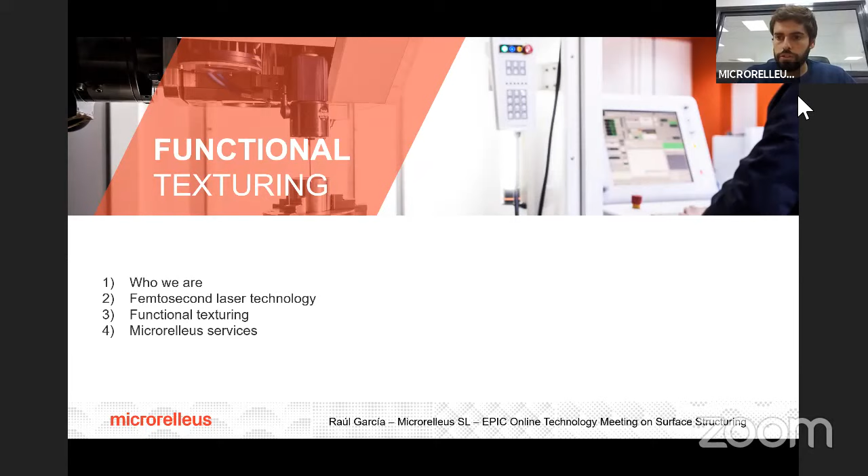So that's our company. We are a service provider for industry. What we do is laser micromilling, laser texturing, microstructuring and industrial engraving since 1983. We are based in Barcelona, and in 2013 we were the first company in Spain and Portugal offering nanosecond laser in 5-axis service, and in 2016 pioneers offering femtosecond laser service in real 5-axis.

For the ones that don't know what a femtosecond laser is, the main advantages against other fast lasers like the nanosecond laser is that thanks to this ultra short pulse duration laser, we are able to achieve ablation, micromilling, microstructuring without almost thermal affection over the part. So we can achieve absolutely burr-free microstructuring or micromilling. Compared with conventional technologies, we can achieve very small details, absolutely burr-free with very clean results. About machining technology positioning, it is between nanotechnology and the size that we can achieve using conventional technologies.

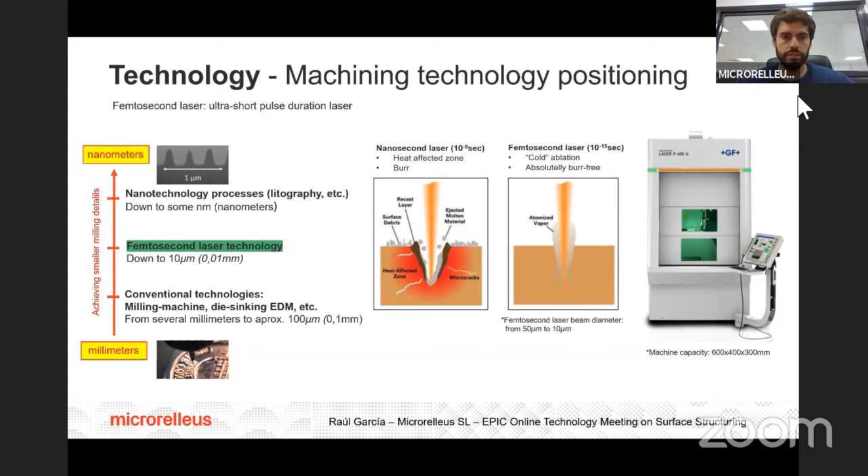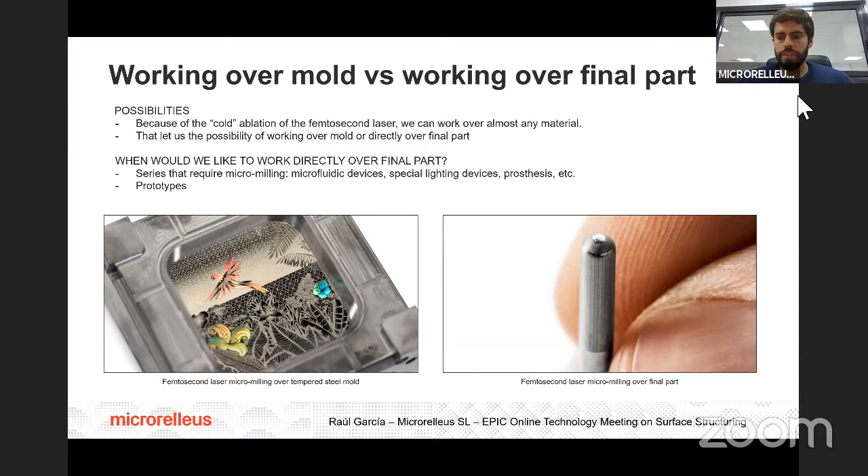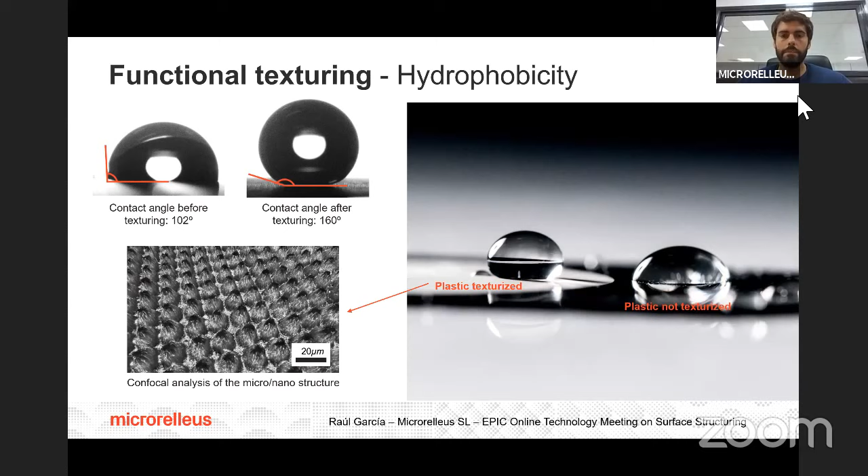So we work sometimes, as I said before, we are a service company. We work sometimes on a mold and sometimes on the final part, and we are going to see now some examples. The first one is the capacity to obtain hydrophobic textures. What we do is we texturize the mold, plastic is injected, plastic replicates the microstructure of the mold, and we can see this hydrophobic property in the plastic part. We can see here the difference of behavior in the area of the plastic part which was texturized and the one that was not texturized from the mold in this case.

In this case here, we can see some sensitive texturing. We can achieve peach skin effect, the velvet effect in a plastic part, as far as we inject a flexible plastic in a mold.

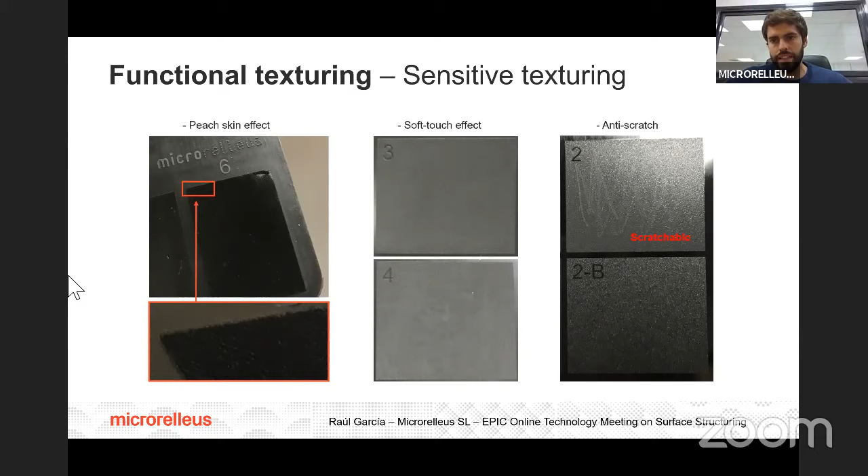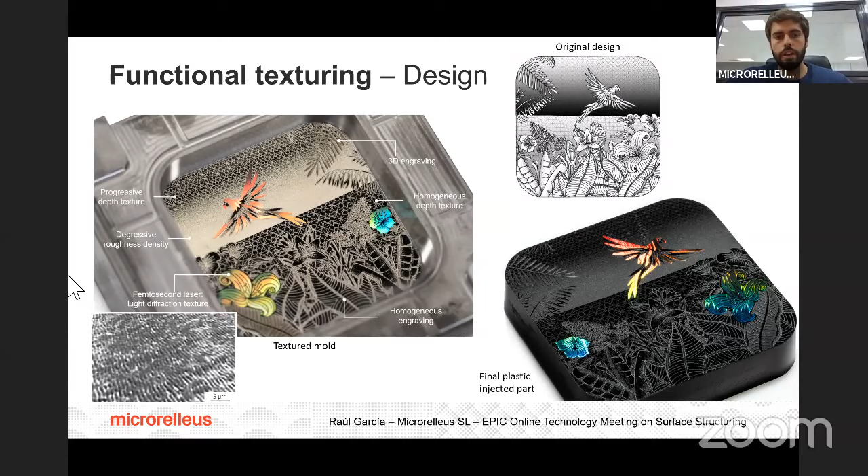We can achieve soft touch effect and anti-scratch effect as well. Speaking about design, we can see an example combining different textures with the light diffraction texture that we can obtain using the femtosecond laser. We worked on the mold and the plastic injected in this mold, and we can see the colors because of this light diffraction texture in the plastic part.

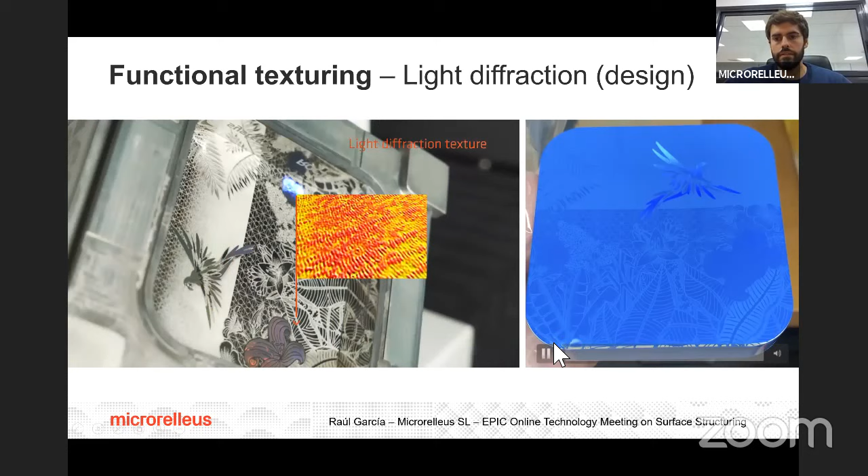We can see here a small video of the mold and a small video of the plastic part as well, where we can see all the colors and effects in the plastic part.

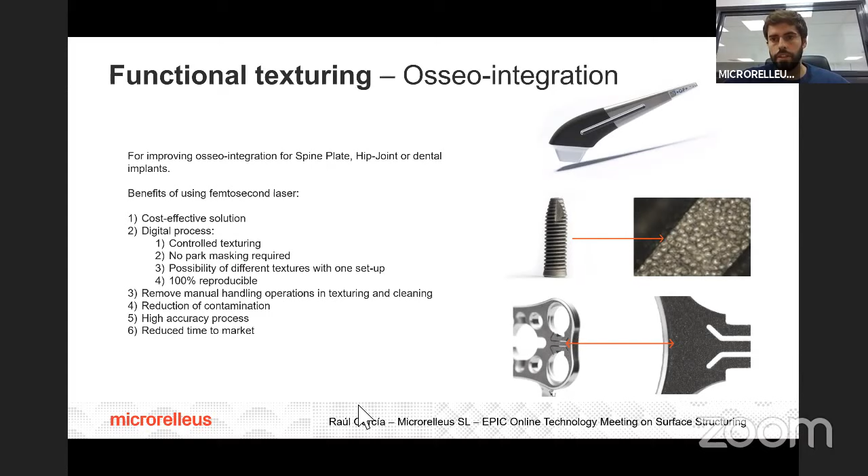If we split directly working over tool or over part: self-lubricating, these small holes that keep the oil here for different tooling. Osseointegration textures to improve the osseointegration in spine plates, hip joints, dental implants, with some benefits against the conventional techniques. About lighting, we are working a lot.

In this case, it's the explanation about prototypes. In this image, we can see some standard roughness that we can find in the market, but we're not able to apply in the prototype, so directly on PC or PMMA, which are the VDI that we can see on the left-hand side, we are able to apply this roughness, which is standard with some values of RA, SA, etc., in the prototype.

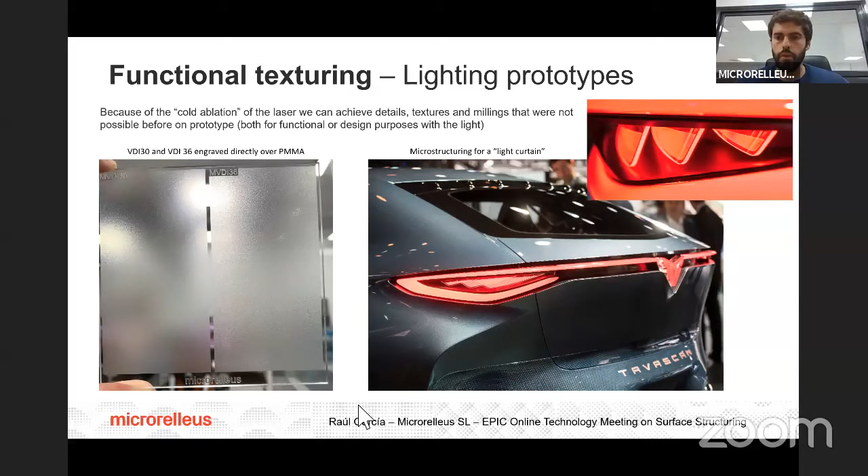So our customer is able to do photometrical analysis of the prototypes, without needing to do the mold. On the right-hand side, this microstructuring is for the light curtain in the rear light of the Cupra Tavascan, presented in Frankfurt last year.

About microstructuring of molds for the lighting industry, the same. We can achieve very small details with very, very small radius. So for optical designers, optical engineers, there's a new limit in the possibility of designing.

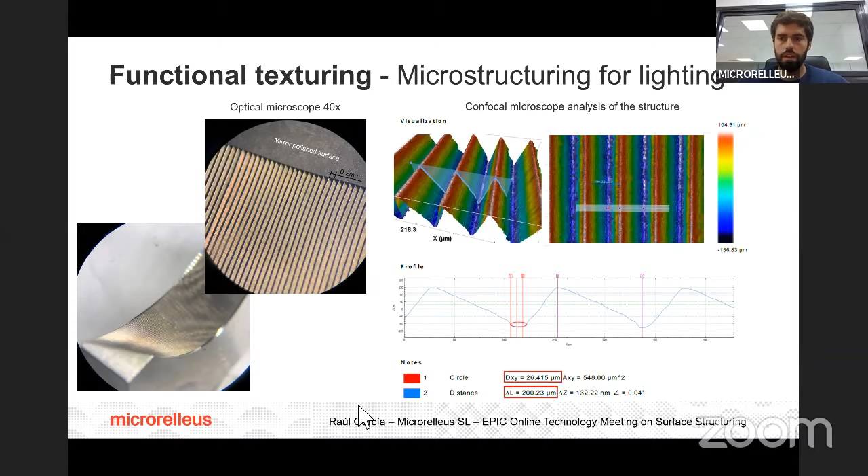And for texturing, again, we can achieve homogeneous light diffusion, controlled light diffusion, that can be an alternative to the standard materials used in industry, just because of using this femtosecond laser technology to work over the molds for the lighting industry.

So it was a small overview about some projects we have done in functional microstructuring and texturing. Sometimes, as we saw, we work on the tools, sometimes on the final part. We do a lot of R&D for customers as well, because there are a lot of new things we can do thanks to this technology.

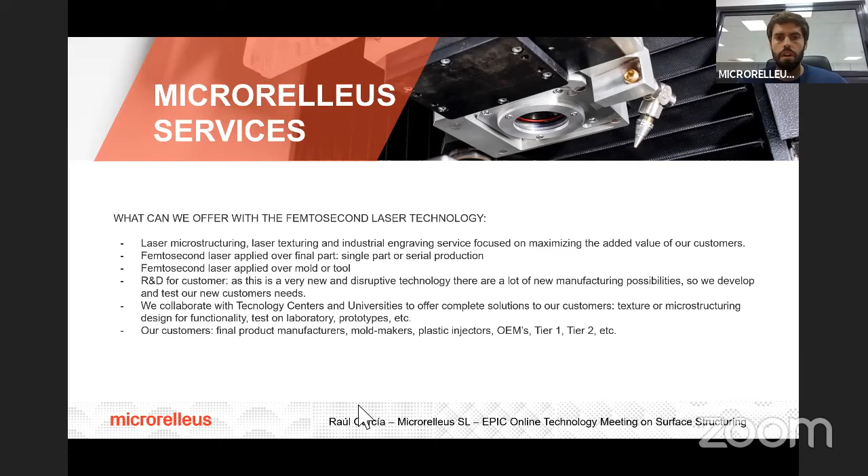Sometimes we need the help of technology centers, universities, etc., that help us develop a texture that we are going to industrialize in the part or in the tool. Our customers are final product manufacturers, mold makers, plastic injectors, OEMs, tier 1, tier 2, from a lot of different businesses, as you saw before.

So that was everything I wanted to explain in these 6 minutes. I don't know if someone has some doubts or something they want to comment to me.

Yes, thank you very much, Raúl, for your contribution. So, as you probably already know, you told us one side of the question, what you can do for this audience. But maybe you can specify a bit what the audience can do for you.

Remember how many people are here, if you don't recognize all of them, there is the full value chain. So any wish that you have, you can express it here, and maybe by the end of the meeting we already have a couple of collaborations about it. But sometimes people don't know that there could be some good functionality for them.

For example, we have worked a lot for electrical appliances, for the automotive industry, for aerospace as well. But a lot of times people from these industries don't know how we could help them with different functional texturing, because they don't know the technology.

Or finally, it's something about thinking how we could improve their product or achieve something that was not possible before for them, just because of this modification of the topography of the part or the tool, without adding any extra material or chemicals or something.

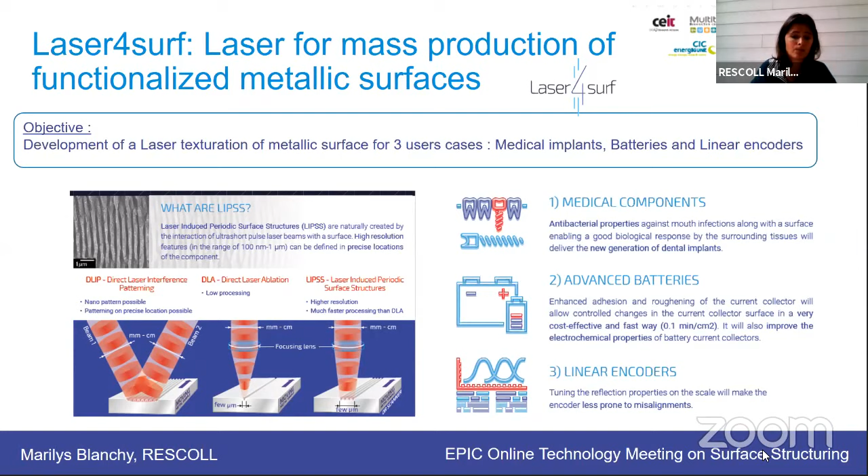So medical implants, batteries, and linear encoders. The objective of the project is to obtain all-in-one machines comprising laser texturing devices, an inline monitoring system, and simulation tools. Applying specific types of patterns and roughness using laser technology has significant commercial potential. It allows improvement of product performance without altering surface composition or adding any coating, especially femtosecond laser LIPSS, allowing cost-effective process times. Today, as I said, I will present the interest in applying laser texturation for medical implants.

So first of all, what is interesting for medical devices to use control of the surface is because there is a failure of implantation from time to time due to wrong integration of the implants—what we call osteointegration. One of the most used materials today for orthopedics or dental implants is titanium, a very well-known and extremely biocompatible material.

It has excellent corrosion resistance and good mechanical properties, but it's also quite inert towards cell interactions. So in some cases implants show long-term failures due to insufficient integration with bone. Several studies showed that good interactions can be improved by modification of the surface, either chemical or physical-chemical modifications.

There are three scales of topography to improve the relationship and interaction between cells and the devices. First, macro topographic features—bigger size features dependent on the design of the implant. Micro topographic features are responsible for mechanical anchorage of the implant to the bone and improving bone-to-implant contact. The last is nanotopographic features that interact directly with osteoblasts, leading to cell recognition and cell proliferation toward the implant surface.

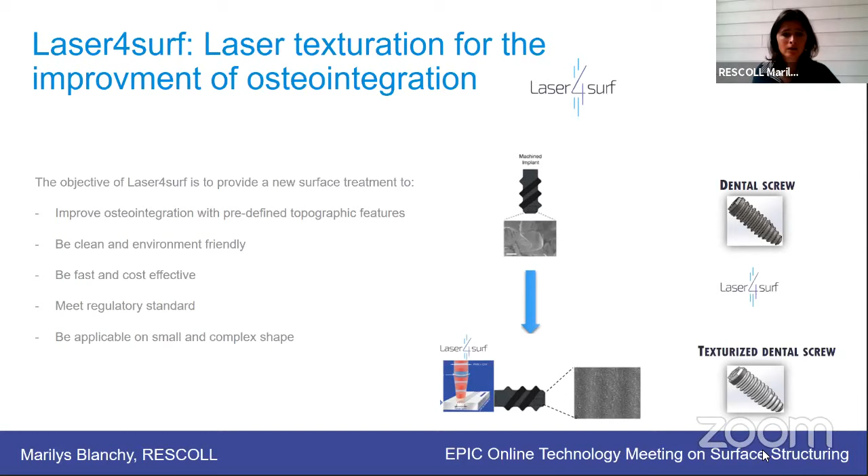If we think about the specifications of medical applications, what is needed for a good technology to be used in medical devices? First, to improve osseointegration with topographic features, to be clean and environmentally friendly, to be fast and cost effective—because if it's much more expensive than already used technology for functionalization of the surface, it won't be worth it—to meet regulatory standards, and to be applicable on both small and complex shaped surfaces.

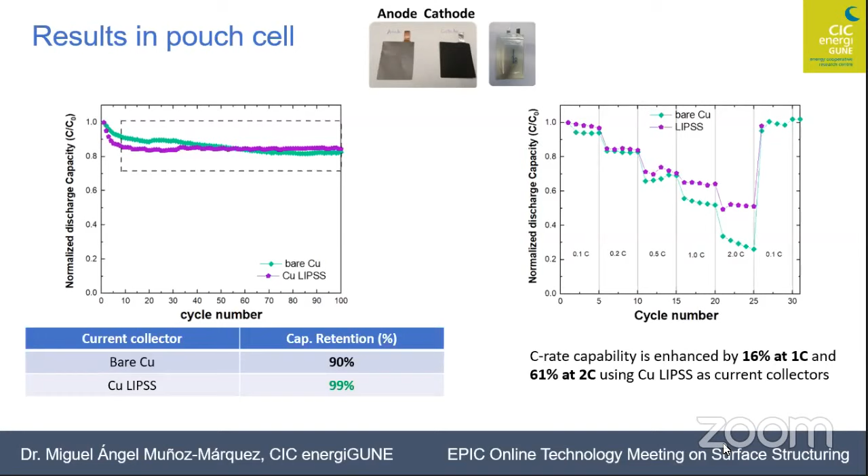I would like to finish by acknowledging the financial support from the European Commission through the Laser4surf project, and all the people who worked on this at both institutions, CIC Energigune and... Now I'm open for any questions you may have.

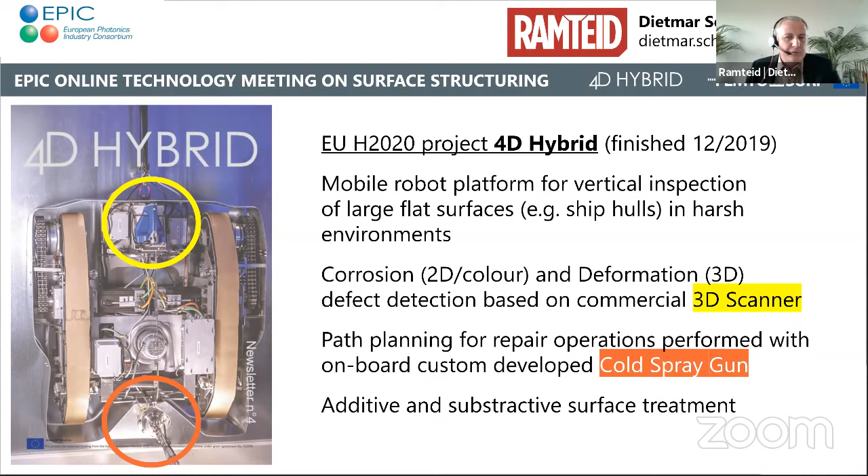The field of view of the camera is about 10 by 10 centimeters, and in the z-axis about 5 centimeters. Everything here works online, so scanning is performed even during the movement of the robot, at a precision of up to 50 microns and a resolution of up to 100 microns.

As I said before, it can detect 3D defects better than 0.5 millimeters in depth or height, or any other shape that the algorithm might have to detect for being repaired.

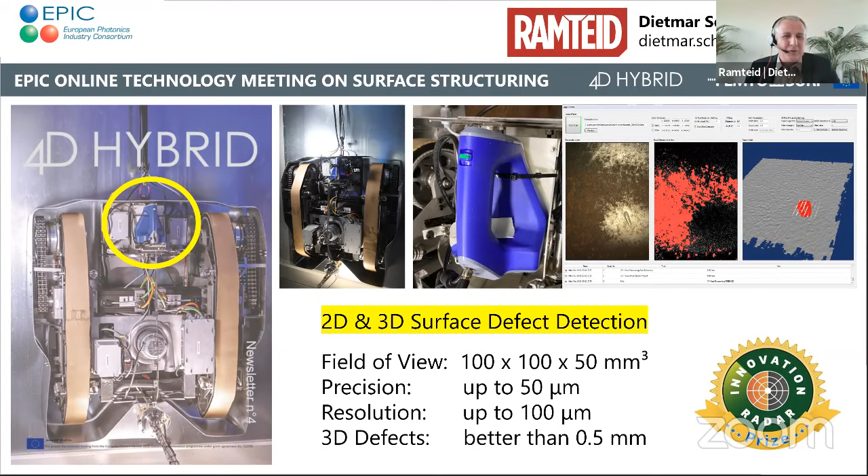This project gained the Innovation Radar Prize 2019 for the most innovative project last year from the European Commission, so we got highly decorated on that project.

Beside this, we are working on another project called FemtoSurf. Later on, Wieners from Femtica will present another part, more or less the laser structuring, and I'm presenting the vision-based scanning of the surfaces, not in the nanoscale as before - this is another project partner - we are working in the mesoscale.

So if the surface texturing is not only happening on very flat surfaces, we are detecting the actual surface structure so that the pattern can perhaps be modified for that non-flat surface structure that might be at the workpiece being processed.

We are using for this - the current prototype of the machine can be seen here at the very left. This is a machine about 3 meters in size, 2 by 2 meters in the X and Y dimensions, and about 3 meters in height, with all the laser infrastructure mounted ahead.

We have a 5 degrees of freedom rotary and movable table, which holds the workpiece, and the laser can be directed to practically every area of that workpiece. We started with flat workpieces that you can see here.

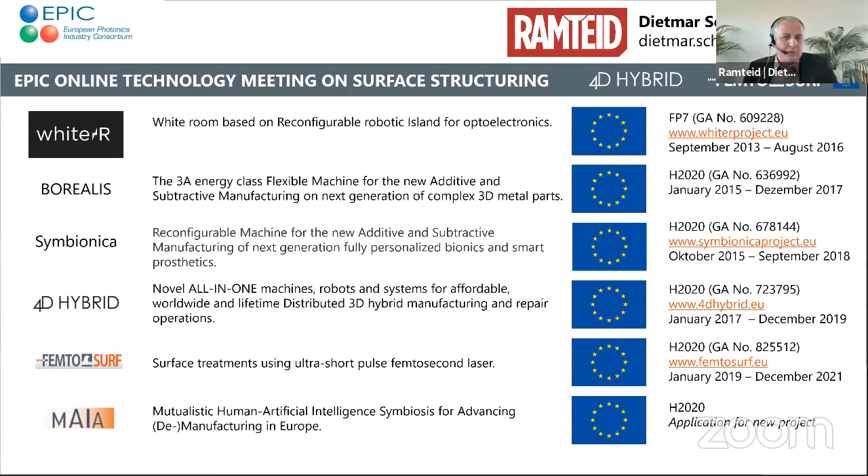Beside these 2 projects, we were also involved in a lot of other research projects from the EU, on FP7 project White-R and others. We provided our vision technology to scan metallic surfaces at a very precise level and provide this even in a real-time or near-time feedback loop to the processing unit of all those machines designed here.

What we are in general is vision-based metrology experts for novel projects, and that's also what we are looking for - partners for other research projects or applications for research projects which need vision experts in their partnership.

Thank you very much, Dietmar, for a great presentation. I am quite fascinated by how many European projects you have participated in. I also see that you are already preparing one. This is an EPIC event.

EPIC is about collaborations. There's a question that people normally get when they are not users: what can you do for them, and what can they do for you? What we can do is provide our vision-based skills and tailor our solutions in a very custom-specific way to their applications. We're not providing a solution for large-scale distribution, but for a very specific, challenging, novel use case.

All right, so basically we have a good set of companies here. I want to understand a bit from the system integrators the kind of needs they have for inspection systems. Not only Ramteid, but we also have companies like NIT and Horiba in the audience. So I want to look at Reinhard now—he gave the opening presentation. Reinhard, when it comes to metrology, inspection, and imaging systems, what kind of cameras do you use, or recommend your customers use, when they scale up your process?

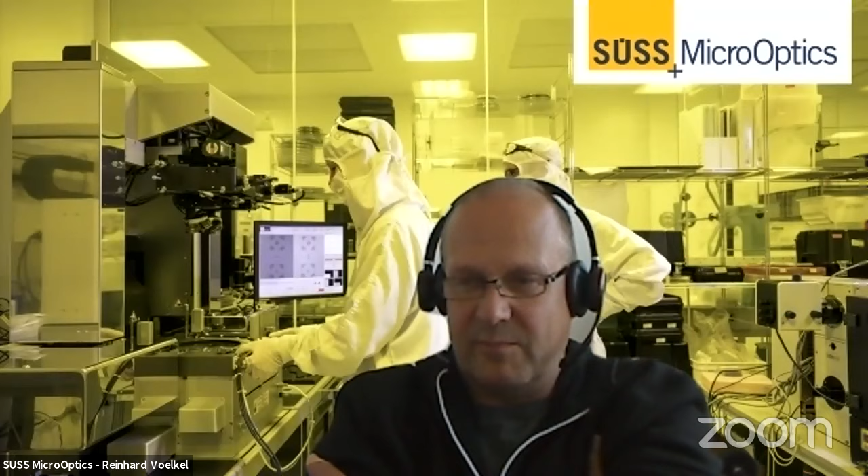Yeah, that's always an issue. So honestly, in 20 years, SUSS MicroOptics, we never made a patent. We never invested in a patent, but it was always our partners who made the patents. Especially what I was saying about this Rochester Photonics case, where everybody came to us and said, can you do it? And can you do it? And can you do it? And we looked in the patent and said, yeah, we can do it, but we're not allowed. So we also recently got an agreement with Fraunhofer for the light carpet, so we are licensing now the patent.

So I once learned from one of my mentors, Bill Hugle, the first president of SEMI, and he said, patents are for big companies who can defend it, or for small companies, if you want to sell the company after 2 years and you want to create some IP. If you're manufacturing, if you got a core technology and your core technology is freedom to operate, that means I'm doing this since 20 years, nobody can forbid it. Now your question is, do you invest in your excellence or do you invest in your patents? And you cannot do both.

So I think maybe I'm wrong, but you are never wrong. Basically, SUSS MicroOptics is a company that has made a difference in the field of micro-optics manufacturing. You mentioned already the light carpet of the BMW, which is a beautiful and successful story. But today we are talking about laser-based surface structuring. Do you have a challenge? Everything has been patented. Everything has been patented already 15, 20 years ago.

It is only people forget about the patents. No, with the patents, I'm very sure - if you look in these complicated nanostructures, surface structures, whatever, it is only you don't have the right keywords. If you look into patents, you'll find a lot of patents. Diffractive optics, random diffusers, all surface treatment - this is all many patents. You could get a patent today, but the patent is not worth much because they just forget that there were 10 other patents on that. But I wanted to talk to you about something else as well.

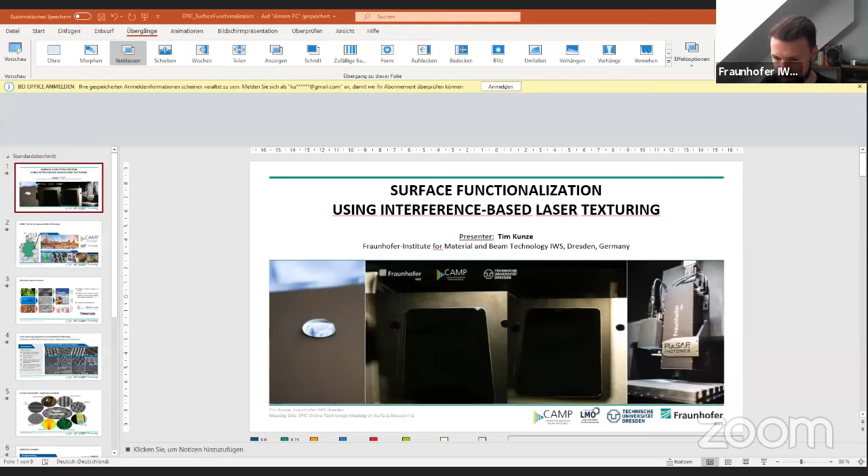Thanks, Jose. So actually, we are - I have to say, not a company, but we are a research institute focusing on, let's say, technology transfer, as Fraunhofer is known about. And I would like to say hello to everyone and also show you a little bit about the stuff which we are doing in Dresden on surface functionalization.

So laser structuring is the topic of today, but of course there needs to be a need in the end. What you see here are some examples. In the middle, you see some sort of high-speed structuring for decorative applications using a scanner. On the left-hand side, a little bit more in the field of wettability, and on the right-hand side, you see actually what we do, which is industry transfer of some working solutions with integrators in the end.

And actually, we are inspired somehow by nature, of course. Most people dealing with surface texturing know the lotus effect, and they know the shark skin and other effects. If you take a closer look at the surface texture, you see that they are very special, unique, hierarchical, very complicated in most cases. The goal has been, for many years, even decades, to bring that onto technical surfaces and address anti-icing on airplanes and deal with friction or biofunctionality issues.

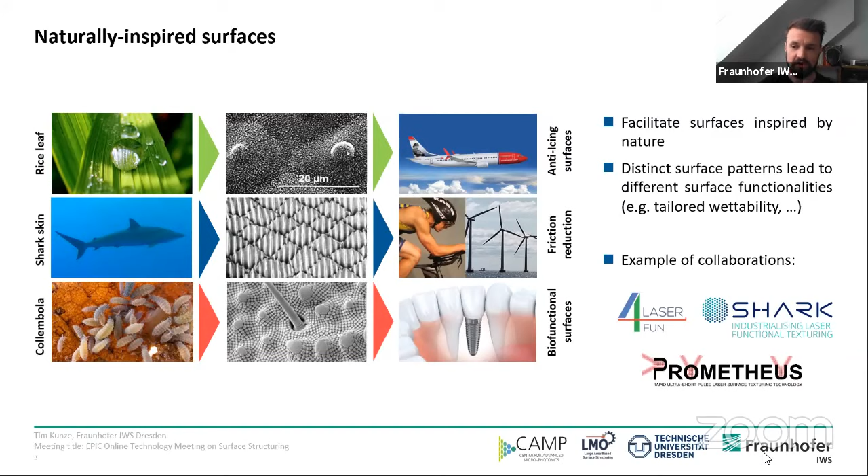As was shown before by Marilys, this is also of course in our aim. We have, let's say, different collaborations going on. On the European scale, it's these 3 projects: Laser for Fun, Shark, and Prometheus. Everyone has a different, let's say, scope. I will come later to that.

Basically, the idea is usually that a particular surface texture has a specific surface functionality. So in principle, we are developing this large area surface functionalization using direct laser interference patterning.

And what you see here is actually what you can do with it. So you see a setup of different surface textures on metals, so stainless steel for instance, polymers like polyimide, and even glass structures and so on, also created by different laser systems, from the nanosecond down to the femtosecond laser pulse duration. And actually, it can be quite complex structures, like in the upper left, some hierarchical structure, some stacked surface structure, and usually you have a broad variety of different patterns.

So it can range from around about 180 nanometers up to 30 micrometers. This is usually the ballpark where we are operating with this kind of technology. And there's always, like in all cases, a lot of questions in this discussion dealing with the process speed. Of course, the process speed is always key, especially for industrialization, and we are targeting very high speeds, so 2 to 5 square meters per minute.

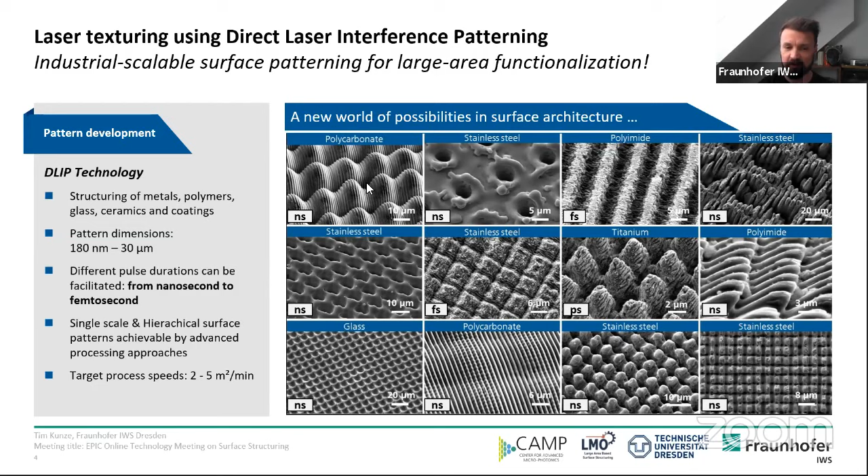So, going from the texture, of course there's always the goal that they need to have a use for specific things, so application examples. What is always appealing, or very illustrative, is decoration or product protection. For instance, on the lower right, you see Bart Simpson, done by diffractive colors, some sort of real colors. Then you have the field of tribology in the lower left. You have light guiding, what was mentioned before, cell growth, biocompatibility, and of course a very big field, wettability, which is in the focus of many applications.

And I have today for you, let's say, 2 application examples, because I think from my point of view this is what counts in the end.

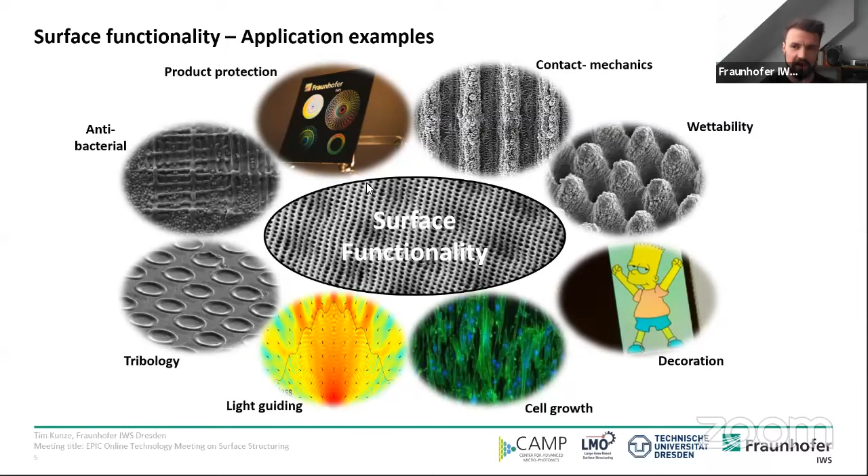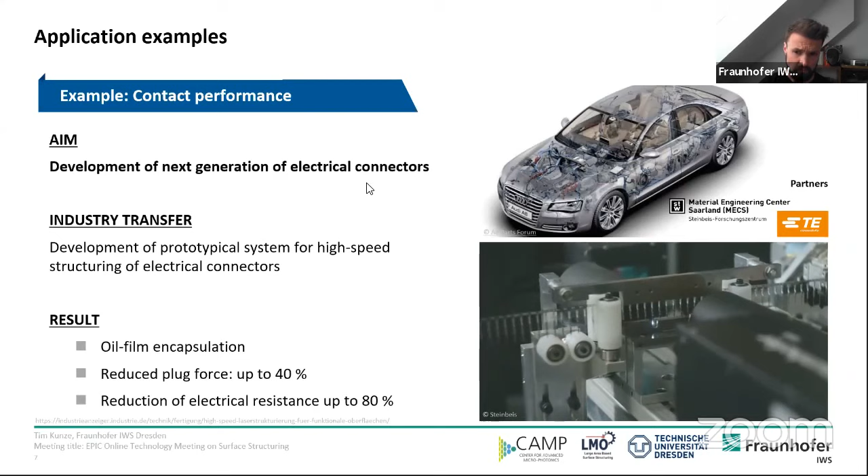So very interesting for the future, for electrification of cars, or even for autonomous driving. It makes the connectors more reliable in the end, and therefore you need a way to do it.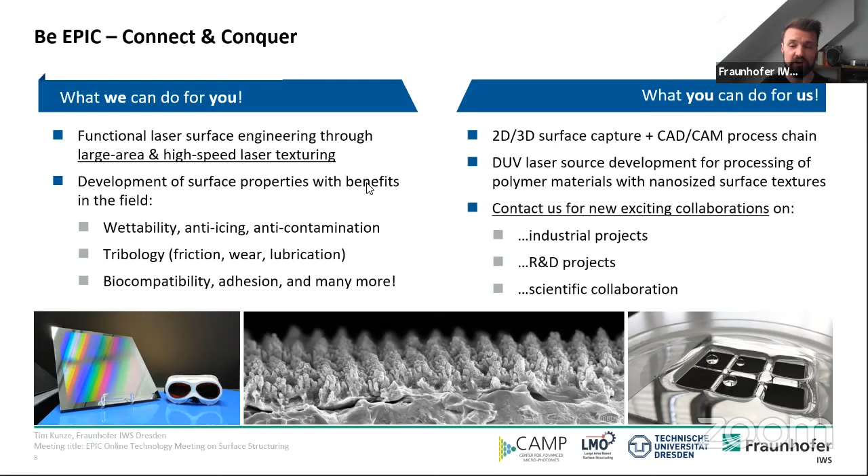As most laser developers know, this is an issue—it's not so easy to develop stable sources that are stable long term, but they are definitely interesting from the application point of view. To close, we are definitely looking forward to exciting collaborations on the industrial scale, R&D, or scientific collaboration. That's very interesting for us, definitely.

With that, I'd like to finish my talk by outlining some important projects. Laser for Fun was the collaboration with Airbus for anti-icing. Shark is on how—we've heard that from Raúl, I think.

One goal is also to predict which laser parameters you need before you actually do a shot, and this is very important. We are working here with a great consortium. Prometheus is dealing with multi-kilowatt development of laser sources for scaling up the technology—2 to 5 square meters per minute is the goal. Lampas is a parallel project also aiming at these very impressive processing speeds.

So then I'm done for today.

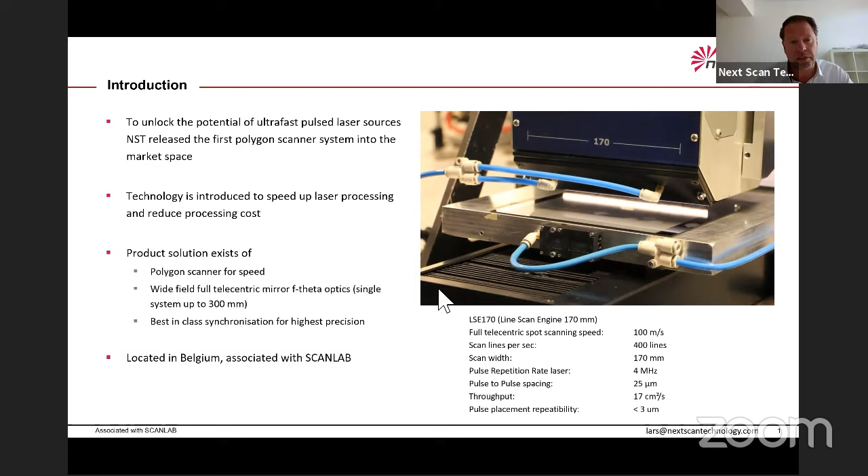It's polygon scanning, but it needs much more than just a rotating polygon. You need the f-theta optics to focus the spot, and that is where we introduced mirror optics instead of glass or refractive optics. So full reflective optics, which gives advantages with respect to thermal loads on the optics. In addition, we introduced a proprietary synchronization method in order to keep the high positioning accuracy and high repeatability, even when increasing speeds.

We're located in Belgium, and since a few years we are associated with ScanLab, so we use the best of both worlds. ScanLab is known for the Galvo scanners, and we try to merge technology in order to service our customers with the best solution.

Here on the throughput, on the right side you see some data on polygon scanning. A typical scan speed can range from 25 to 100 meters per second, but we go much faster, as you will see in a second. To give an idea on throughput lines, 400 lines per second, full telecentric. In this case a 6-inch wafer, but we also have a 12-inch wafer size which we can do full telecentric. And of importance, of course, is the high repeatability in micromachining, which is where the synchronization comes in.

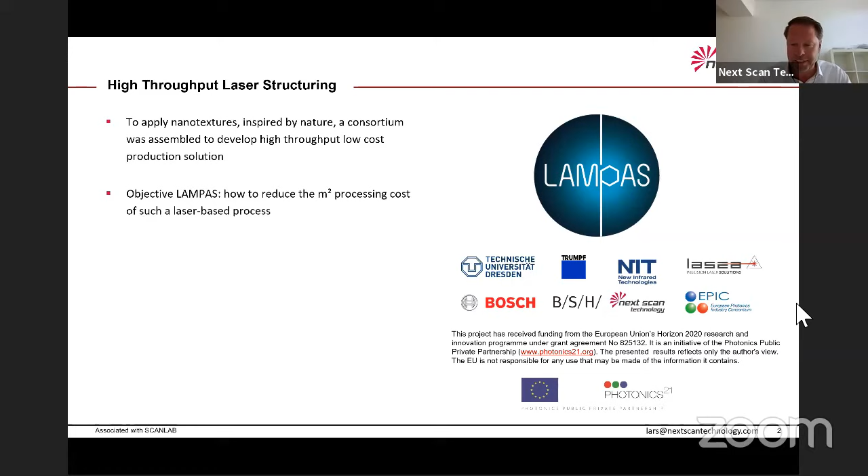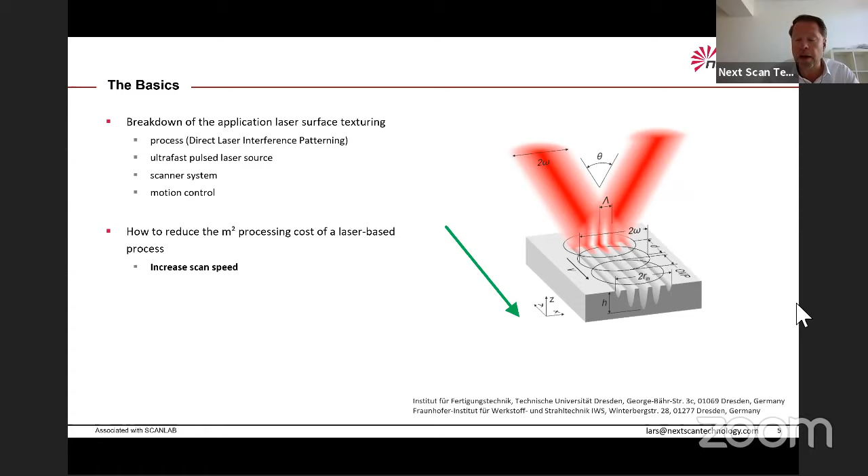So what do you need to do to reduce the square meter processing cost? Number one, of course, is increasing speed, but increasing speed also requires more laser power and more pulse frequency. So what we need to do is develop a laser source which is able to deliver high power and high pulse repetition rate. To give some idea on the effect of increasing pulse repetition rate on scan speed, you will see the scan speed increases if you move up the pulse repetition rate.

In the case of the LAMPAS project, we have a 10 megahertz laser source, which gives you a ballpark figure of 250 meters per second. It of course depends on the process parameters, but let's take this as an example because it's close to reality. So what you get is quite a high scanning speed, 250 meters per second - that's five times faster than a really fast Galvo scanner. So that gives you already some idea of what is happening with the throughput.

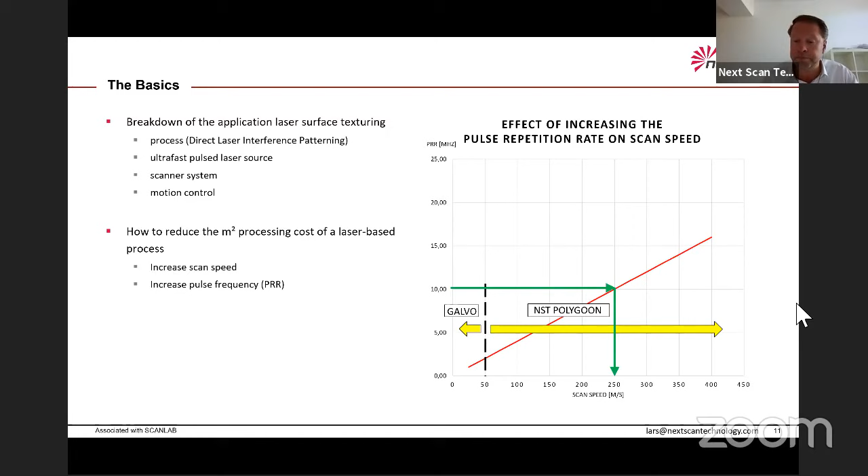If you look at the square meters throughput, if you look at a polygon scanner with those kind of scan speeds, then you're going to get up to quite some square meters. Note that this is quite small features, so it's not really applicable to the DLIP process because that's more in square meters per minute.

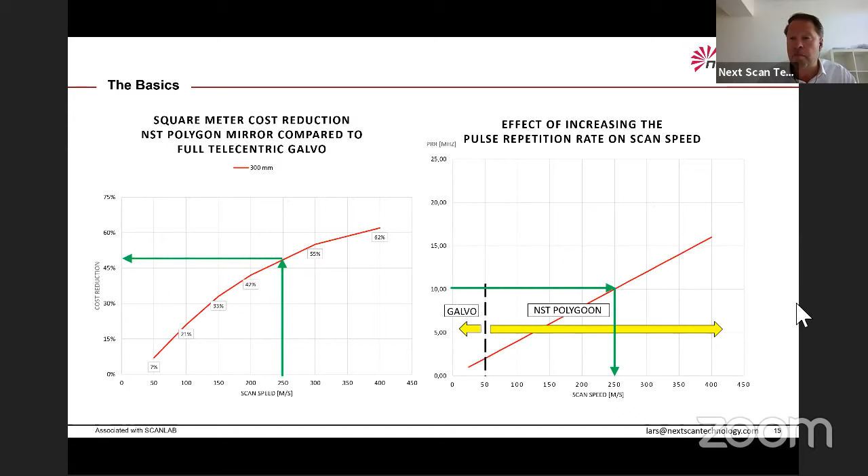If you look at what it means if you increase those scan speeds, what does that mean for your square meter processing cost? Because that's all about what the customer is interested in - what does a square meter cost to process. You see that even with those higher scan speeds, you can really get a good, interesting cost benefit, which opens up all kinds of possibilities for trading established techniques by a laser-based process.

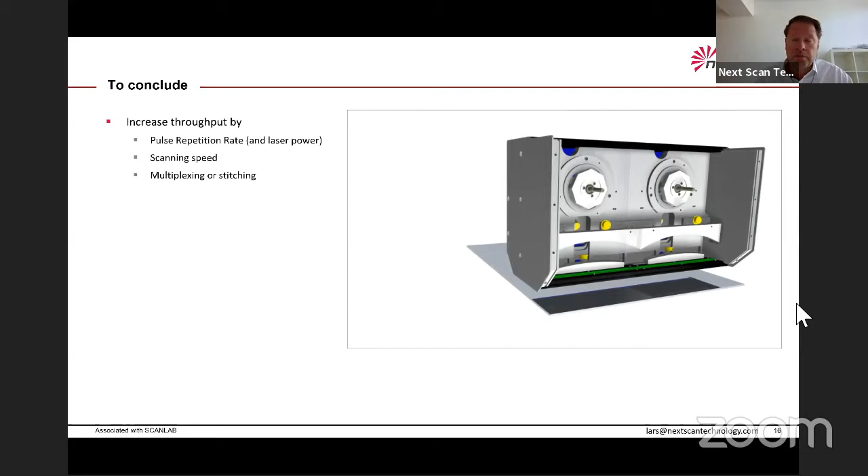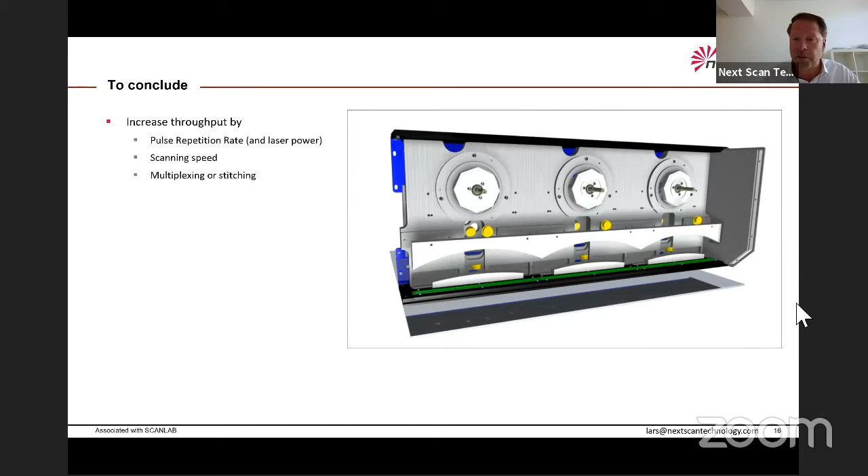To give an idea on how to increase throughput much more, so we talked about scan width - we have 6-inch, we have 12-inch, but what if you want to do square meters, like air wings or displays or that kind of solutions? Then you can go into the multiplexing or the stitching of solutions. This is also a technology well known in the graphic arts, and we also move that from graphic arts into laser material processing.

So here you see a 900 millimeter, or somewhat more than 900 millimeter, scan line length multiplexed, and that is the way how you can process square meters with the latest advance of ultra fast pulse lasers.

So that's my short introduction on the polygon scanning, and I think I've touched a few topics which have been addressed in the earlier presentations. So thank you very much.

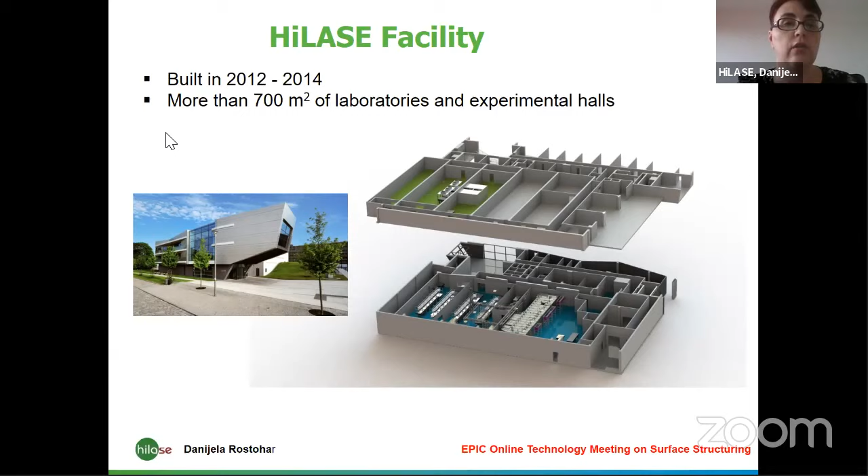If we speak about the location of HiLASE Center, we always like to say that we are in the middle of Europe, or more precisely, in a small village called Dolní Břežany, which is near Prague. HiLASE has a very nice facility, developed between 2012 and 2014, with 700 square meters of laboratories and experimental halls.

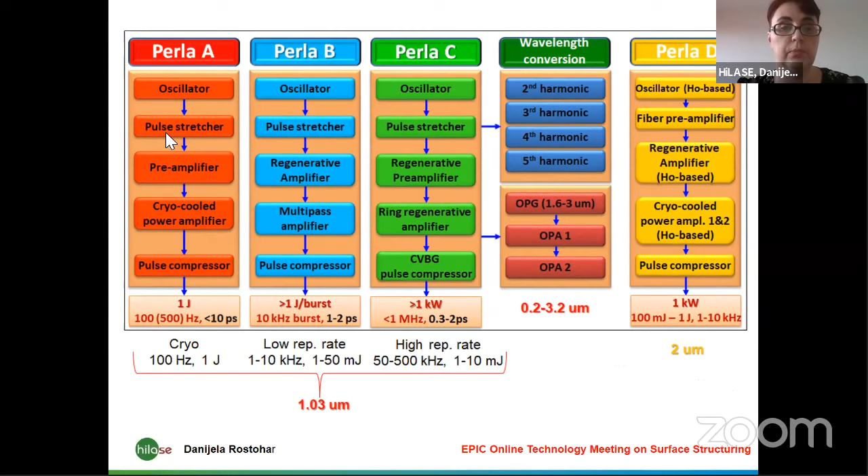Recently we started exploring other materials, like in Perla D, where you see we are starting to use holmium-based materials, meaning we are moving to 2 microns as well. HiLASE also has a lot of know-how in wavelength conversion, meaning we are able to provide our customers and users photons between 200 nanometers and up to 3.2 microns.

Based on this know-how, we recently started developing a more compact, industrial-grade laser we call Perla 100. This laser has 100 watts average power, 100 kilohertz, 1 millijoule, operating at 1 micron, with pulse duration below 2 picoseconds. What I'd like to bring to your attention is the beam quality, shown on the right side - the M squared of our beam is close to 1.1.

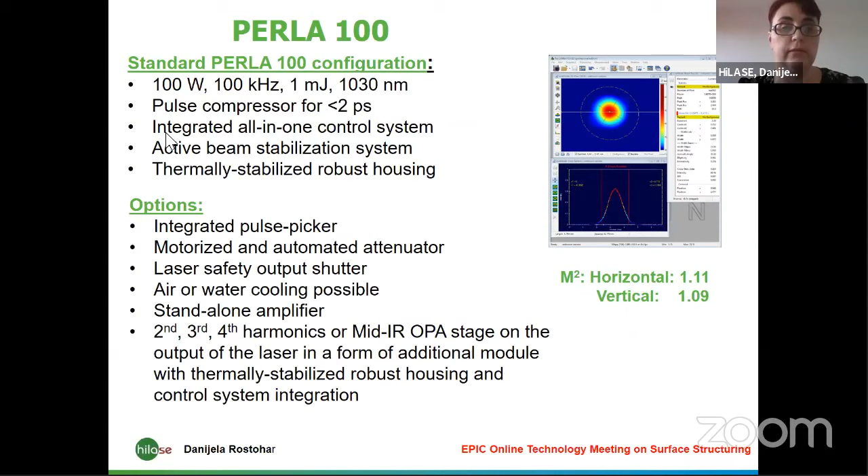Beside the standard laser, we start also thinking about customized solutions. Here is just some of the ideas. We are open for any other. And I would like to say that this year we are delivering 2 systems which will be integrated in processing stations. The Perla C100 delivers 1 millijoule pulse energy per pulse. That means we have to look for another approach how to use this laser.

In the first approach, we use a diffractive optic element. I won't go into more details, but with our laser, in cooperation with one of our partners, we were able to get, at the same time, 784 small beams.

Another way to use this DOE approach is when you already know which kind of structures you would like to have. That means you can pre-design diffractive optic elements and then print those structures. We already demonstrated that we can cover a millimeter area with just a few pulses and with very high resolution. I should mention that M squared plays a very important role for this application.

Another approach has already been mentioned so many times today, so I don't have to say anything more. Thank you to Tim and his team, we were introduced to this wonderful technique.

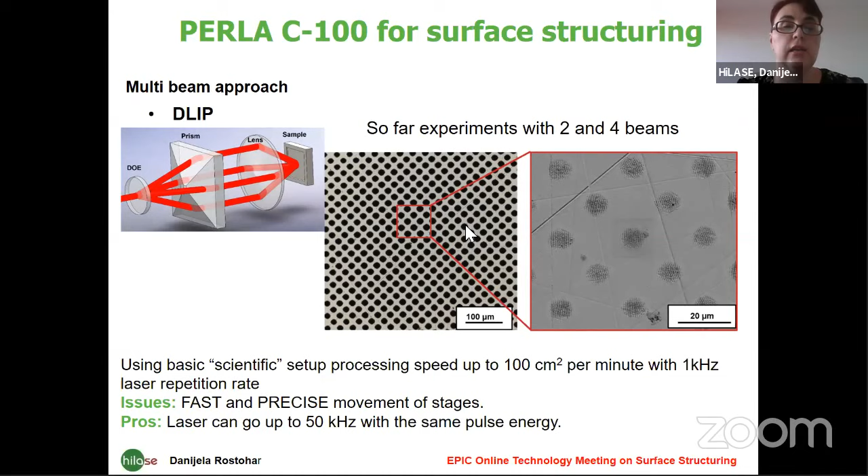What we saw as the main problem was that we are missing fast and precise movement of the stages. And I'd like to bring to your attention that the energy per pulse we are using here can also be run with a laser operating at 50 kilohertz.

At the end, to answer the magic question of what we are offering and what we need: we are offering expertise in developing customized high-intensity, ultra-short laser systems. We need partners who will help us explore the capability of this system for surface structuring applications. That means we are missing partners working on scanners and optics for efficient usage of millijoule energy per pulse, and also faster and more precise stages.

Since the main philosophy of HiLASE is to produce lasers for industry, we are missing end users with applications that are really going to benefit from usage of millijoule ultra-short laser pulses. With that, I'm finishing my presentation and I'm open for questions.

Thank you very much, Danijela, for a great presentation. Thank you for keeping it on time and for telling us exactly how to help. I have a lot of companies here that manufacture optics. We are all wondering about this fantastic DOE system that you have there. Could you specify a bit more about the laser optics you use and perhaps share some challenges with the companies today?

I think the main challenge generally with millijoule lasers is the laser-induced damage threshold. That's one of the main challenges we are having. That means it's not only designing those elements, but also designing them in a way that's suitable for these energy profiles.

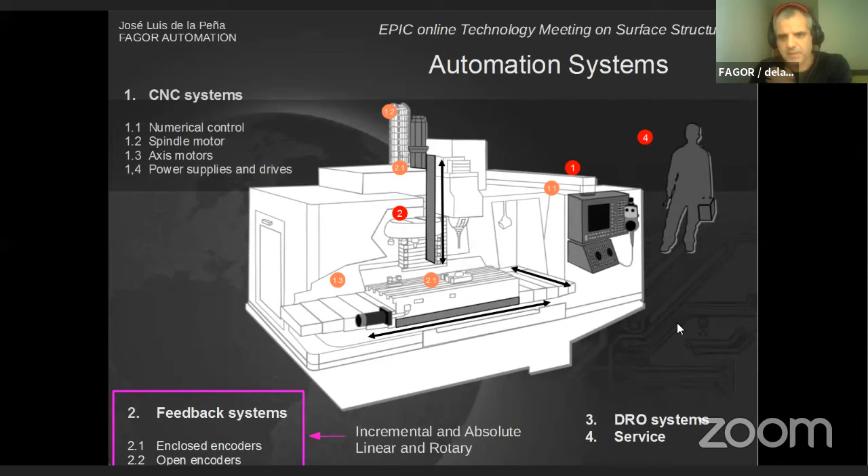So what is an optical feedback system? Every feedback system, every optical encoder, contains 2 parts: one reading head that is moving and one scale that is fixed. Normally the scale is fixed to the machine and the reading head moves, and we try to control the movement between the reading head and the scale. This movement is given to the CNC in order to control the movement of the tooling.

Normally all the scales are a diffraction grating, usually 20 micron pitch. This is an absolute scale - here we have two tracks, the incremental track and the absolute track, depending on the different technologies we have.

The working principle is the following: we have a scale and the scanning head that contains an LED to illuminate the scale, and a grating and analyzer to interact with the scale. From this interaction, in some part of the space, we have an optical pattern. This pattern moves according to the movement between these 2 gratings. In order to catch this movement, we have to put a photodiode on the plane where the optical image is located. Then we can transform the optical modulation into electrical signals that are sent to the controller. So the principle is quite easy.

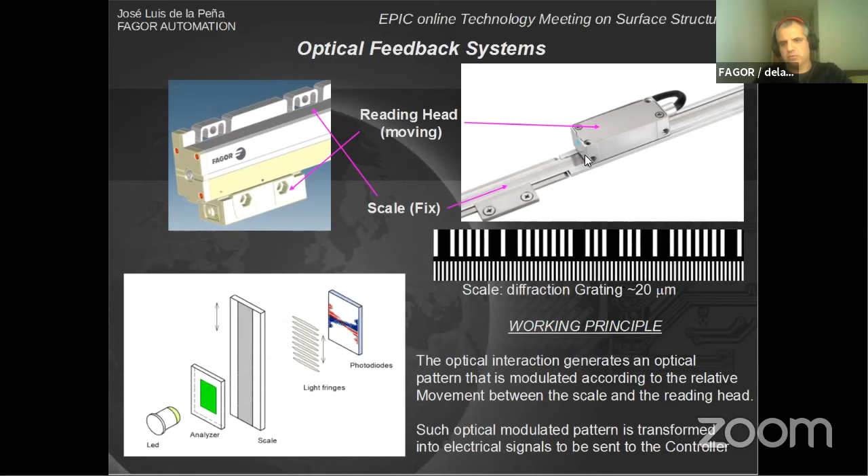One of the most important things for our end users is the gap between the scale and the reading head. In some products, for instance this one, we show the reading head and the scale separately - it's like an IKEA product, and the end user is responsible for the mounting. So the end user has to fix the scale to the machine, then fix the reading head to the bracket in the moving part, and we provide them some tools in order to get a good alignment and a good installation.

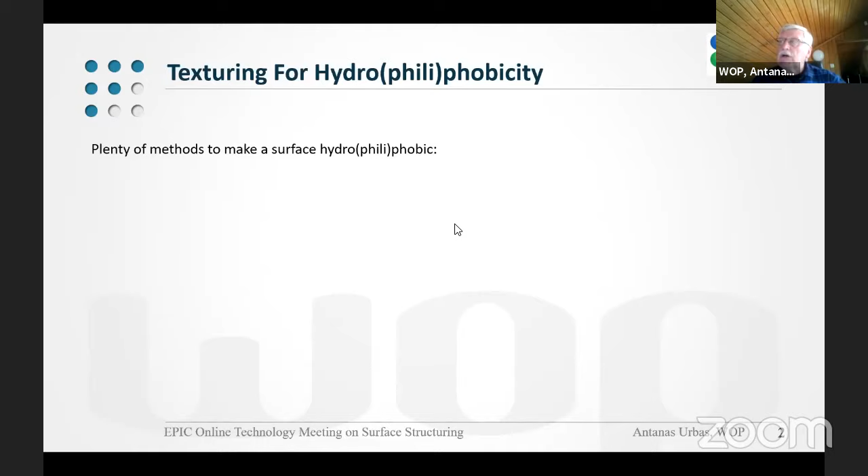Hello everybody from Lithuania, my name is Antanas Urbas. I'm from Workshop of Photonics, and we work mostly on cutting, drilling, dicing, all the possible materials, because we use femtosecond lasers, and as one said today, nothing can withstand femtosecond pulse. So by working on it, we thought that maybe there will be something suitable for structuring, especially if talking about hydrophobic or hydrophilic surfaces.

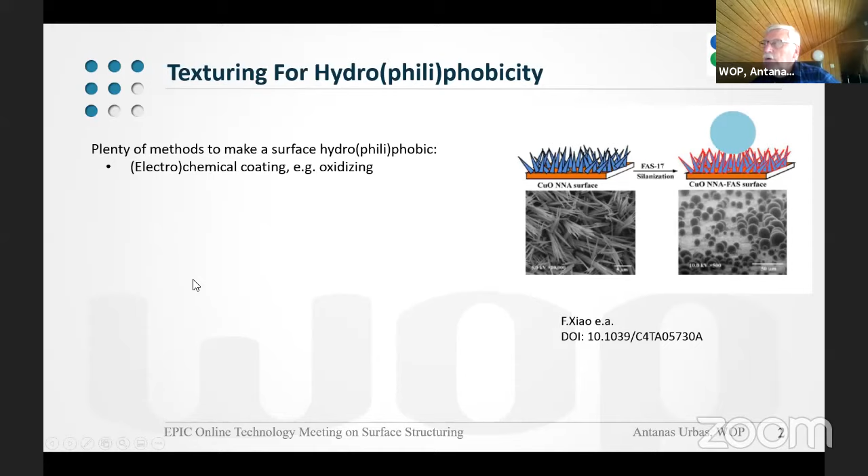Historically, we saw many methods today, and if we look to literature, we can see plenty of methods of doing this. One is just covering with some chemical or electrochemical surface, which can work as a hydrophobic one. Another is depositing materials from plasma, and more importantly, these depositions can be put on previously laser machined surfaces.

So we saw many methods of machining. I think if we speak of square meters per minute, the best way of doing it is interferometric, like we saw from the Fraunhofer presentation. But we are not strong in it, so we thought about different things.

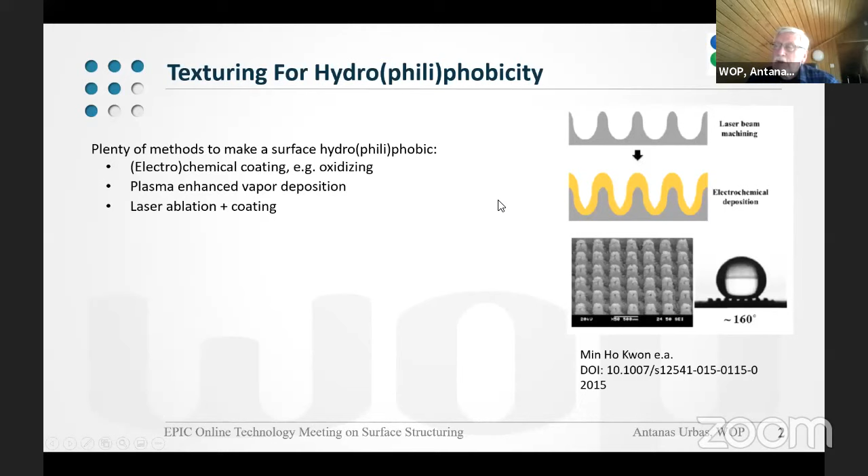It was mentioned that laser-induced periodic surface structures appear after putting some kind of laser pulse on the surface. We saw that femtosecond lasers generate tricky things like surface plasmons and plasmon polaritons. And we thought, what can we do to make it more efficient or more tricky, or maybe use one beam instead of many beams, like in the previous Danijela presentation where it's split into 700 beams. Can we do this or not?

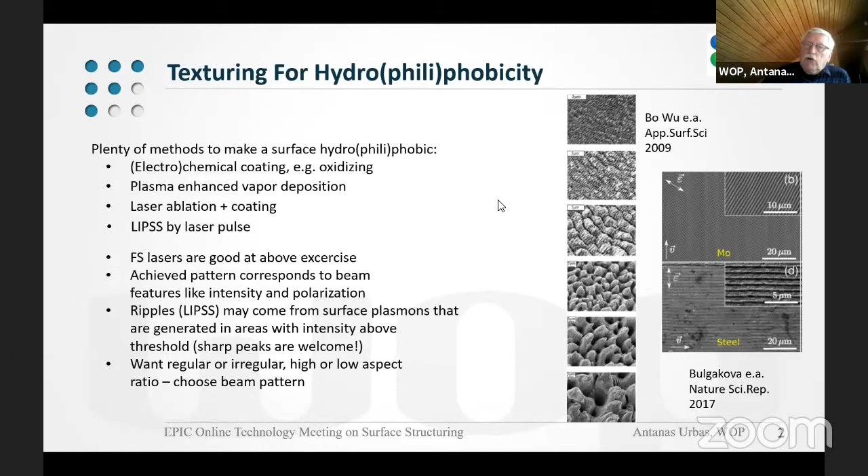Then we were thinking how to make a pattern that may be quite efficient and cover a big area of your target material. So we work with non-diffracting beams a lot, and starting from Bessel beams, we can build a lot of interesting patterns.

The Bessel beam was mentioned in the paper as generating surface polaritons quite efficiently, but the problem is that the area of it is very small. It can be microns or submicrons, so it's not suitable for structuring or texturing.

You can make a superposition of various Bessel beams of higher topological charges, like in this picture. If you make the superposition of -1 and 3, you get this picture, or -3 plus 3, you see quite a regular thing. This can also be sent to your target.

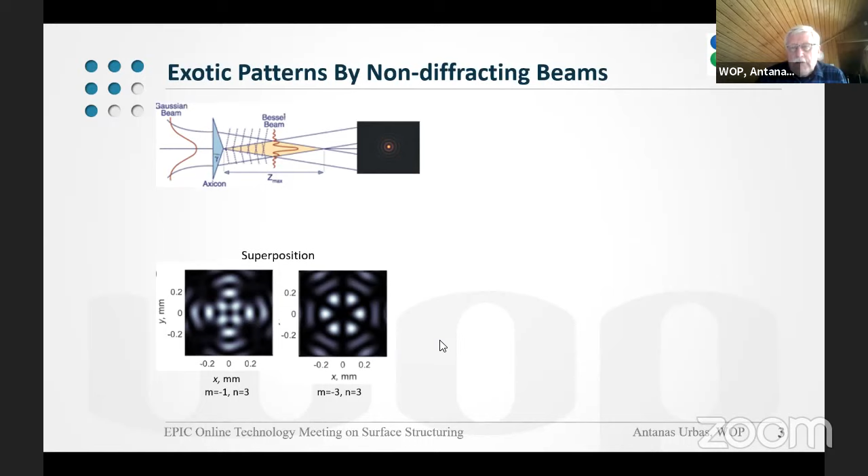And if you are crazy enough, you can even combine Bessel beams with Weber beams, and you will probably be happy like this guy in the picture.

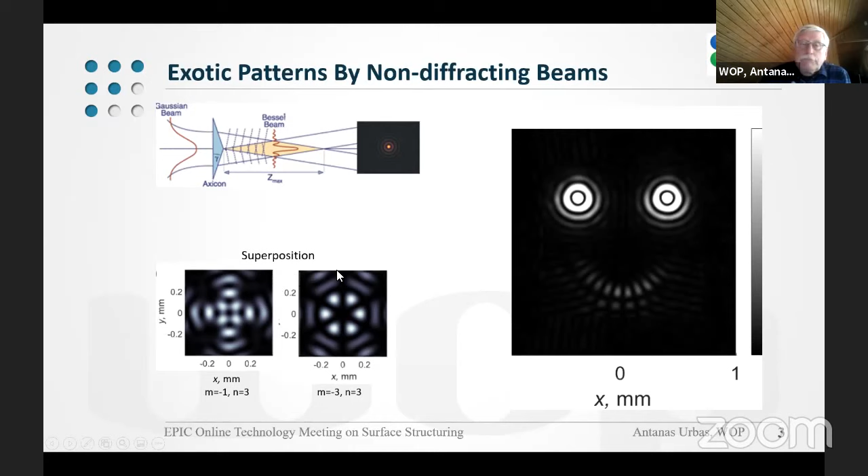So how do we do this? It is known that if you focus your laser pulse into fused silica, self-organized structures appear which are perpendicular to the polarization of the light you focus. These structures are a couple of micrometers in size, and each acts as a tiny half-wave plate. If you organize these half-wave plates according to a prescribed rule, you can make optical elements which change the geometric phase of your beam across the cross section, controlling it very nicely.

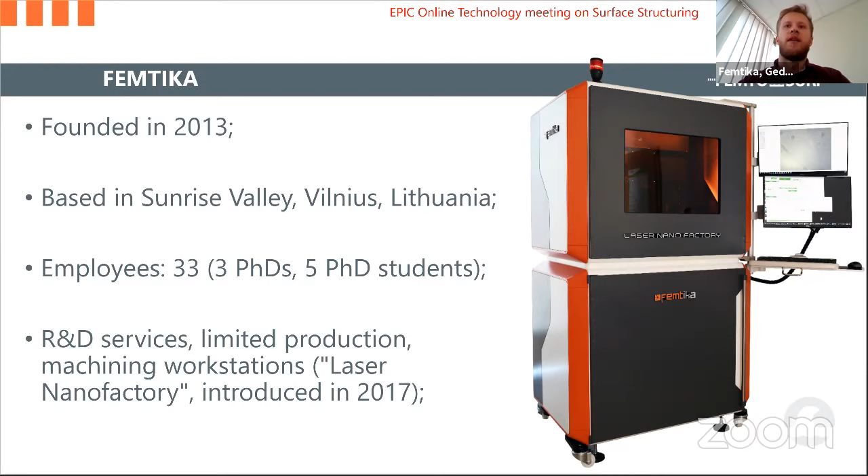Femtika mainly works with 3 material processing technologies: selective glass etching, which is subtractive manufacturing; multi-photon polymerization as additive manufacturing; and also surface structuring for different materials using ultra-short laser pulses.

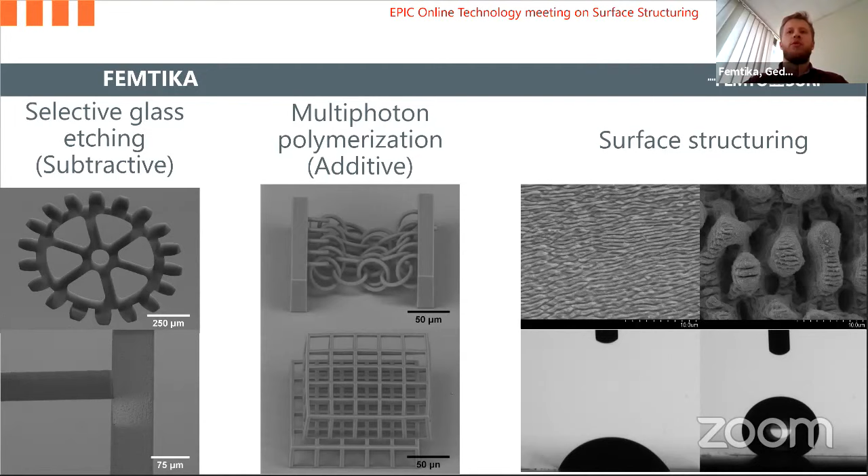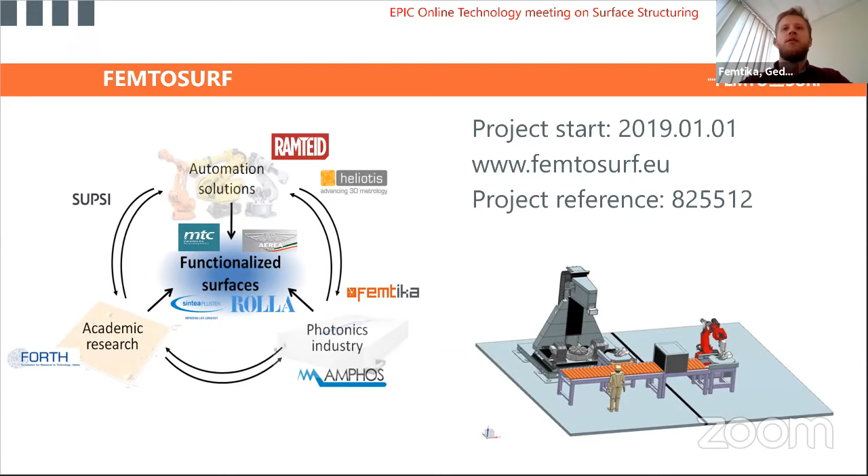Answering the question, what can we do for you and what can you do for us: there are many publications about how beam shaping can make a huge impact for surface structuring, but there is very limited supply of beam shaping elements in the market that could be tunable and, most importantly, could handle very high power of femtosecond lasers. For example, most spatial light modulators can handle only up to 100-150 watts average power of femtoseconds, and in this project we're talking about kilowatts of femtoseconds. So we see a huge necessity of beam shaping elements like that.

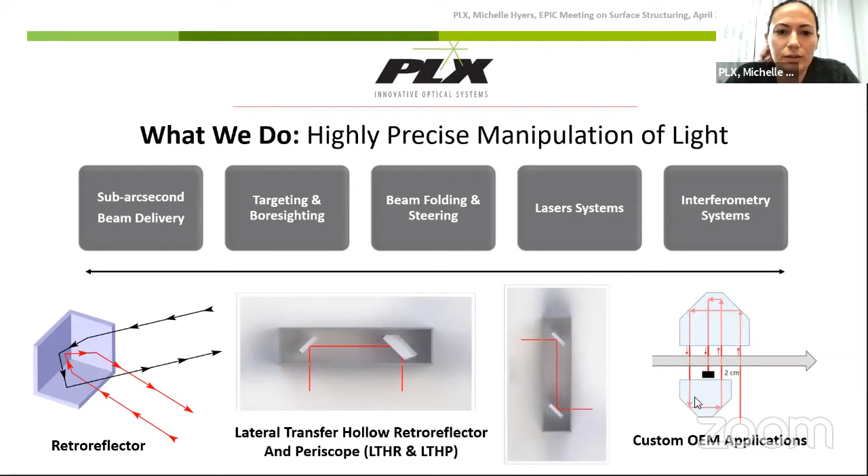In our business model, we really work at the level of assemblies all the way up to system integration. If you have a custom application, like developing a new laser system for surfacing, we want you to come in at the beginning level because it can really help us integrate our technology for your maximum benefit, all the way up to the housing system level. What we're looking for in EPIC, and in general, is to work with our technology and find key partners who can utilize it to develop different applications.

What we do in-house is engineering, utilizing our technology and expertise to do high precision optical assemblies and solutions. We do analysis of those systems, including FEA and a lot of environmental testing like thermal, vibration, and shock. We also do the fabrication. We have the optical shop, assembly, coating, clean room, everything you need to really bring that solution to life.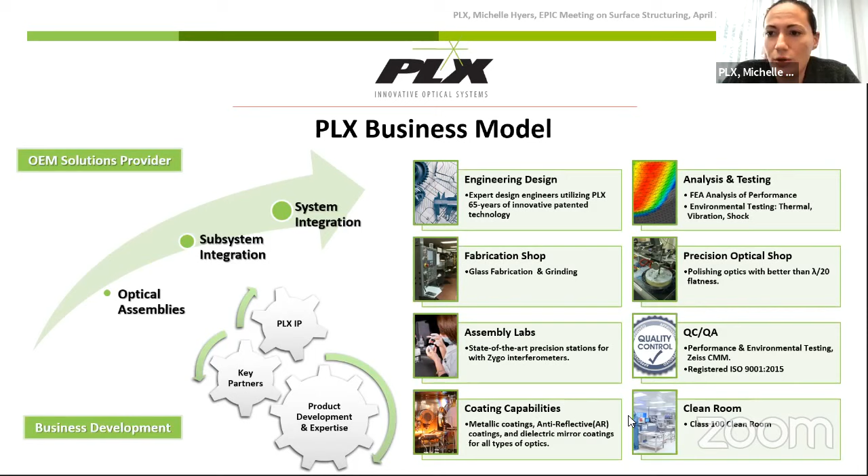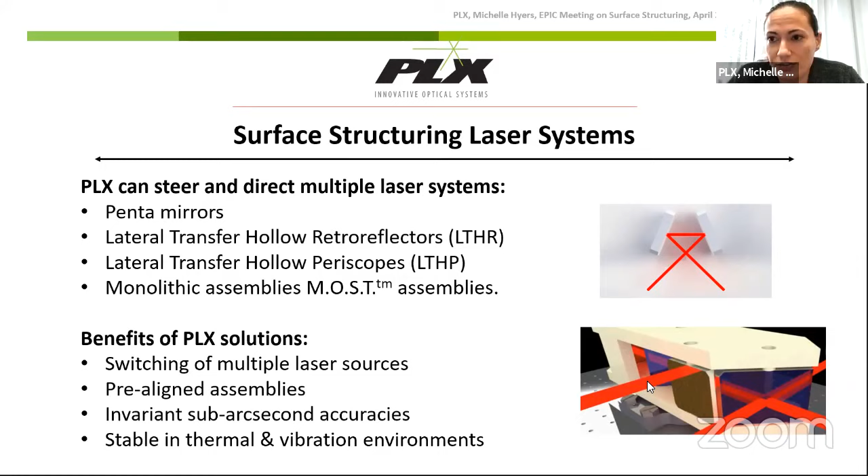You don't have to worry about adjusting everything, and it's very highly stable in thermal and vibration conditions. So if you're worried about doing high scan speeds, or you have high power heat issues or vibration issues, these sort of products are used - a lot of our applications are actually military defense. These are battlefield-condition-ready optics.

We can use basically some of our LTHP, stacked in this articulating arm setup, and we can do multiple axes. But the benefit of this is the invariant system - because of this, if there's any kind of slight movement or deviation, you don't get the alignment issues that may plague your system. So you should be able to get a much higher accuracy at the beam delivery site.

With this, you can move the beam around - you're not moving the workpiece. So you can potentially make a much more compact laser system. If you're doing this instead of something like a scan lens system, you're not necessarily required to have the long working distance, so the system can be much more powerful and compact, and it's not limited as much by power handling issues like fiber systems.

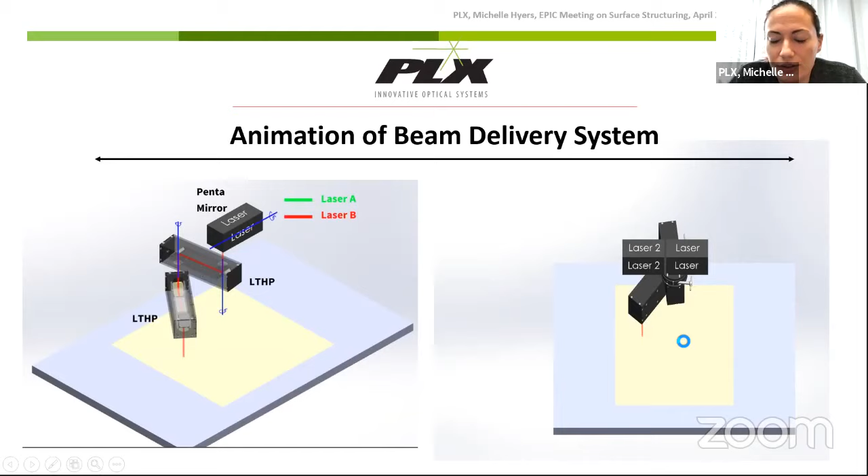So it just shows basically taking a system, combining some of our high precision assemblies, and basically having a very robust system for laser scanning on the surface. And we can do multiple configurations. This is just to give you an idea of one possible version.

So with this system, there's a lot of benefits that PLX can offer using that technology. Because they're front surface mirrors, you have wavelength independence. So if you want a quick switch among different lasers, different laser types, wavelengths, that's perfect. Beam diameter, usually a lot of our systems are around 1 inch to 2 inch diameter, but we can really customize. We've done a lot of different scales. So you can get a large power density and low divergence.

The structural design, our elements are enclosed and, like I said, pre-aligned, so you get this accuracy. The beam deviation I talked about and invariancy is really important to have that performance, and that also comes with a lot of stability. So a lot of our systems are athermal designs with CTE-matched materials, so anything thermal, vibration, or shock is not going to be an issue in our sorts of systems.

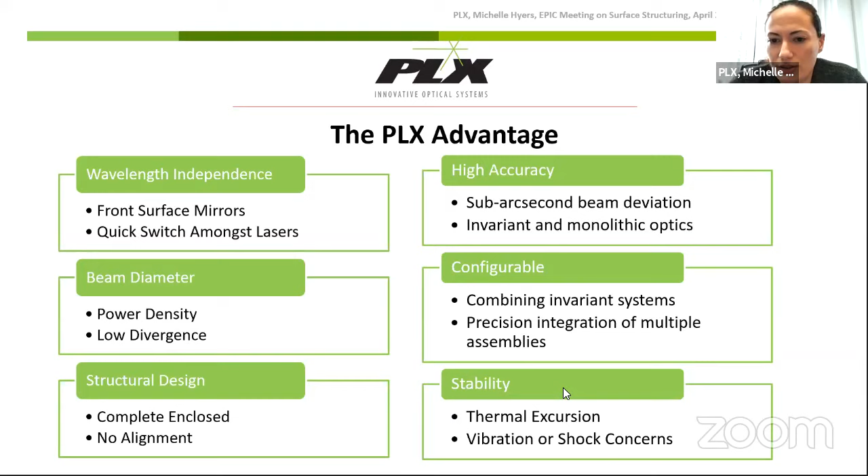So I talked about the most briefly. I just want to show a little quick video so you can kind of see exactly what I'm talking about.

Oops. Go through. Play. Maybe it's on the other screen, if you have a second screen. No, it's not going. Okay, let me just show you this one.

So basically, if you take a conventional optical bench setup, you can really combine these elements. If you think about this in terms of the surface structuring system, you might have all these different elements that are moving and being adjusted. So there's a lot more room for error and inaccuracies, especially if your system is scanning really fast and there's vibration and other factors going on. This really takes those elements out of play and puts it into this kind of sandwich structure.

And this is extremely customizable. We've done all different types - this happens to be, you know, an example in glass, but we can do other materials, metals, ceramics. We can do different elements. We can do freeform optics. This could be mirrors, beam splitters, anything, lenses - anything you can configure can be put into this technology.

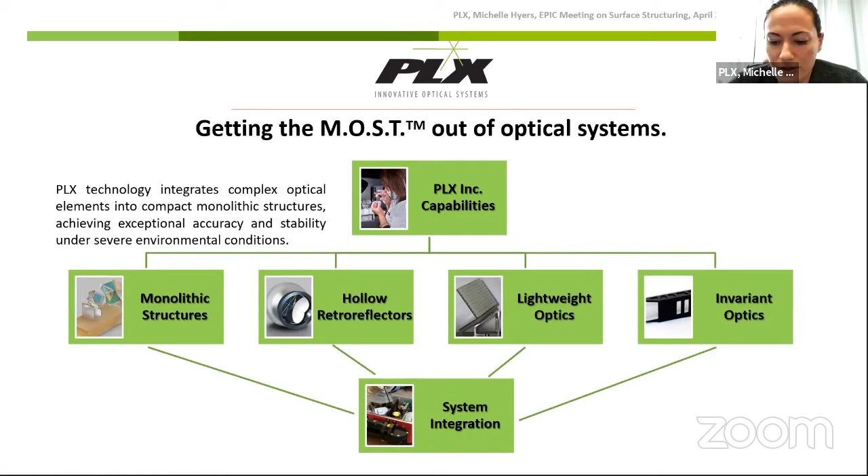And all of these different elements of PLX - the monolithic, the retroreflectors, we can do a lot of lightweight optics, and invariant optics really come into the system integration level. And that's where you can provide the most benefit for you guys developing these sorts of systems.

Just to give you a quick range of what we can do scale-wise, wavelength ranges, beam deviation, and sizing. Depending on the scale of your system, we've made things very, very small, down to let's say 2 millimeters. We've also done some opto-MEMS as well in this industry. Then things up to - we talked about this, that spacing of the beams - we can go up to, you know, basically meters as well.

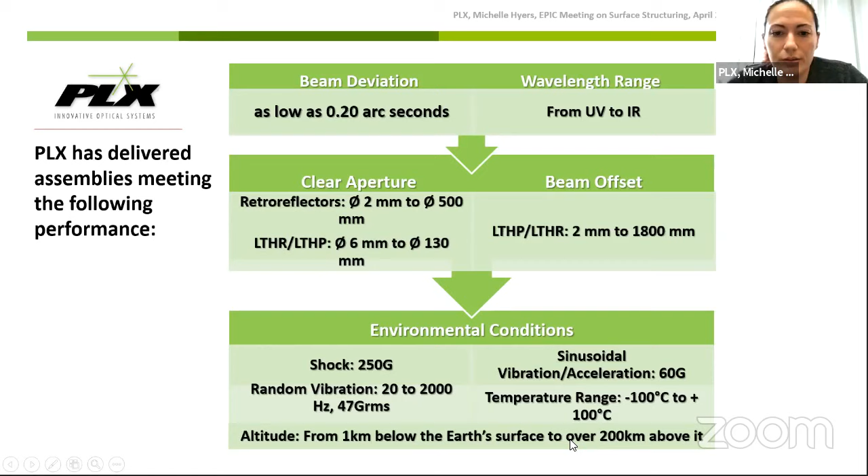And environmental - I mentioned the shock, I mentioned the temperature variation. These are just some of the numbers so you can see what we're talking about in terms of shock, vibration, and temperature range. And then this is to show you all the different versions of some of the things that we can do.

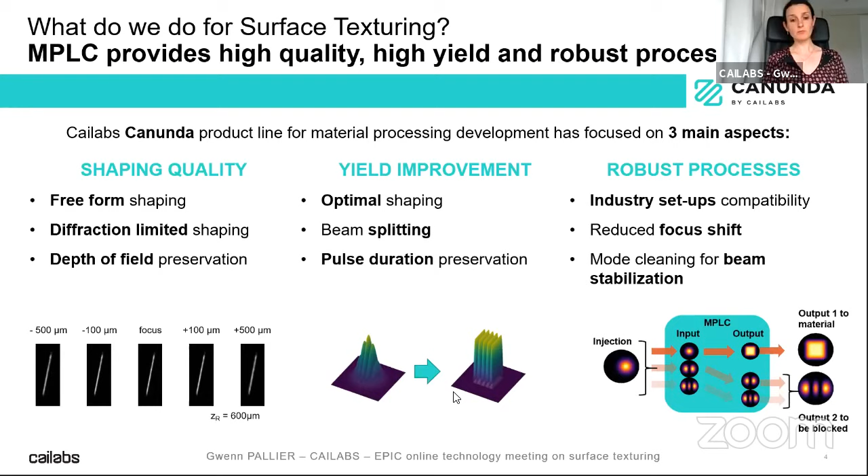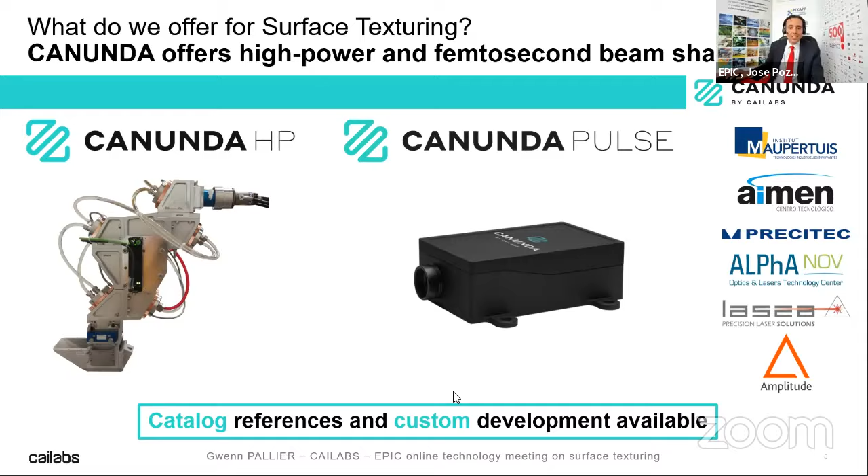Now, the last slide. Sorry. Go ahead. Sorry, I thought you were finished. Please go ahead. No, I'm sure it was your question, actually. No, yes, I'm sure. What can... Let's do it like this, like it wasn't planned. Thank you very much, Gwenn, for a fantastic presentation. Let's do the EPIC question. What can you do for them? What can they do for you? Okay, very good, I'm happy to answer that. So basically, I did prepare it very well. I have a slide for that. Can we click share? Yeah, so I have to share it again. Let's all see this beautiful slide, which I interrupted. Do you have it? We are almost there, yes.